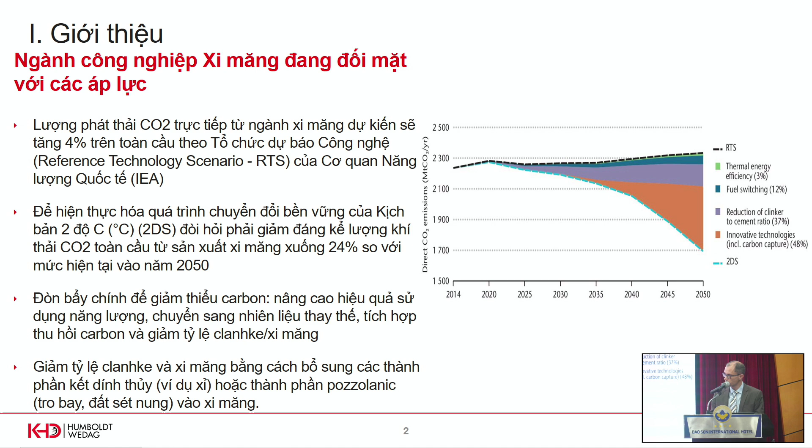So nowadays I want to speak about the clay and the calcined clay issue. What is clay? Clay is a mineral, exactly a hydrous mineral, which consists of silica and alumina, and was formed over the years by weathering. The three main kinds or types of clay are kaolinite, illite, and montmorillonite.

What we can do with this, we can activate the pozzolanic properties of this material by using heat. When we use heat, we dehydroxylate the combined water, the mineral bound water from the clay. As an example, we transfer kaolinite to metakaolinite and evaporate the water. This treatment and this loss of water increases the reactivity of the silica and alumina phases in the clay, and that's the reason why we choose kaolinite as an example. Kaolinite has the highest potential for this transformation for getting a pozzolanic activity.

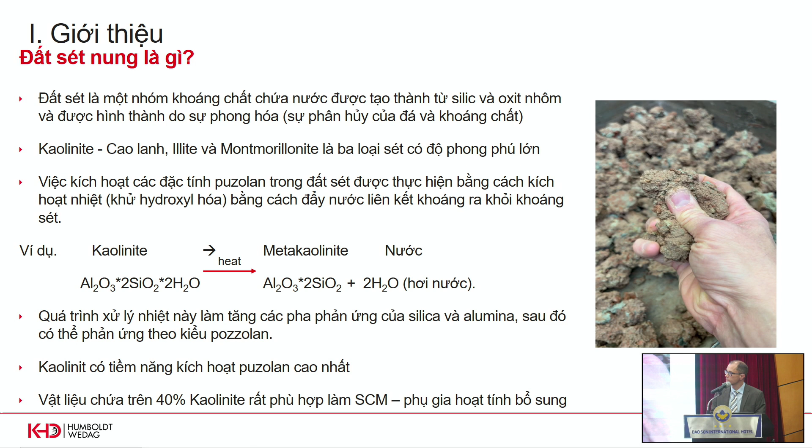In general, really in general, we say when your clay has more than 40% kaolinite, we can use this as SCM, supplementary cementitious material, like this one. And this kind of clay we can use in our plants.

What is the economic situation and the properties of calcined clays? I mentioned we have SCMs now available, mostly slag and fly ash, but this is limited and not everywhere available. Clay is mostly everywhere available, also in the quarries as overburden called waste material. Kaolinite is also often used in the ceramic and paper industry. When the content of kaolinite is too low for them to use, that will be perfect for us.

Because we can also use it for clay calcining production. So all the pits in the world which are not sufficient for the ceramic or paper industry are perfect for us to create our calcined clay.

According to LC3, the limestone calcined clay cement, it's a general overview. We can use the ratio of clinker at 50%, 30% clay, 15% limestone, and 5% gypsum. And we have a little bit of space to increase these figures up to 35 and 20 according to the LC3 formulation.

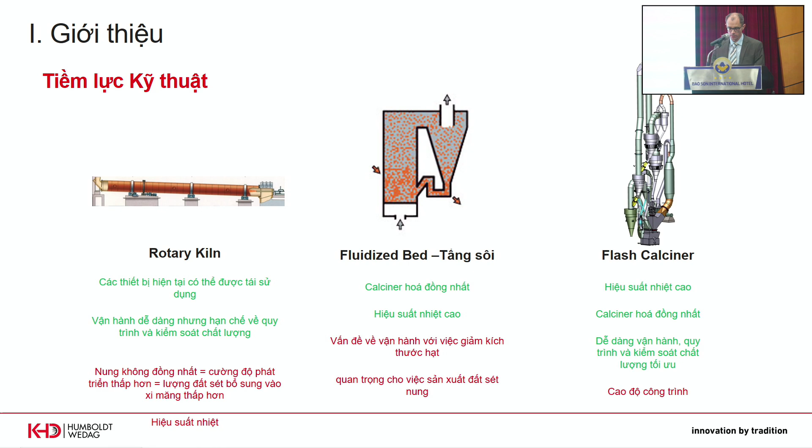The next part is the overview. We have three steps in the process. The first is the drying and comminution process. The second is where the material is preheated and calcined. The third step is the recuperation of heat and the cooling of the product.

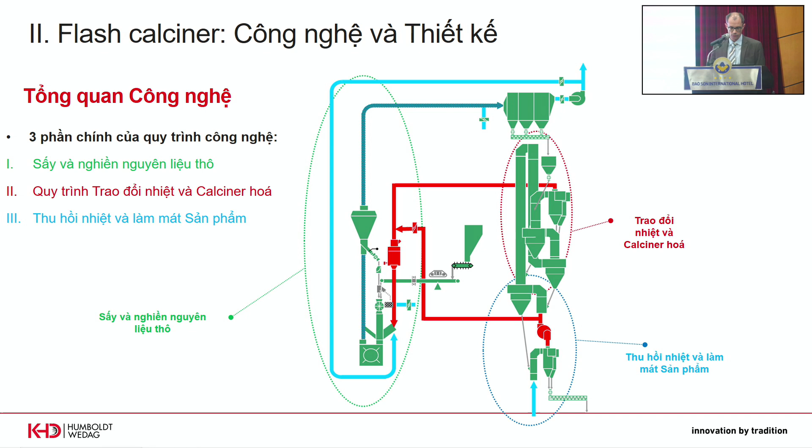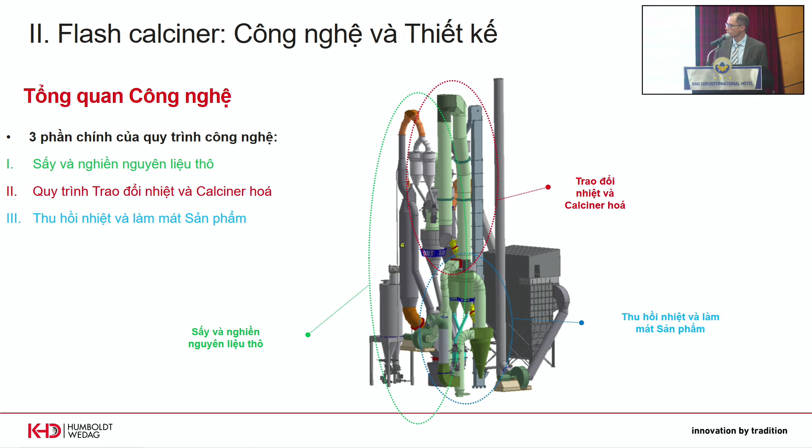So this is the flow sheet, and here you can see a 3D model of this plant. Here is the drying and comminution area, with the hammer mill. Behind it is the separator, and the preheater and calcining section with the calciner and different cyclones. The last part, the recuperation section, consists of two cyclones where the final product is cooled and separated.

The first step is the drying and comminution, let's say grinding of the product. We feed the product into a hammer mill, an impact hammer mill. It's a common KHD product for semi-wet plants, so when we convert old cement plants from wet or semi-wet processes, we use this equipment. This is often done in Russia.

We can handle moisture in this hammer mill up to 25% in the feeding material, with final drying down to 1 to 3% moisture after separation in the filter.

For separation, we have a static separator. The fine material goes to the filter for final separation, and the coarse material goes back to the impact hammer mill.

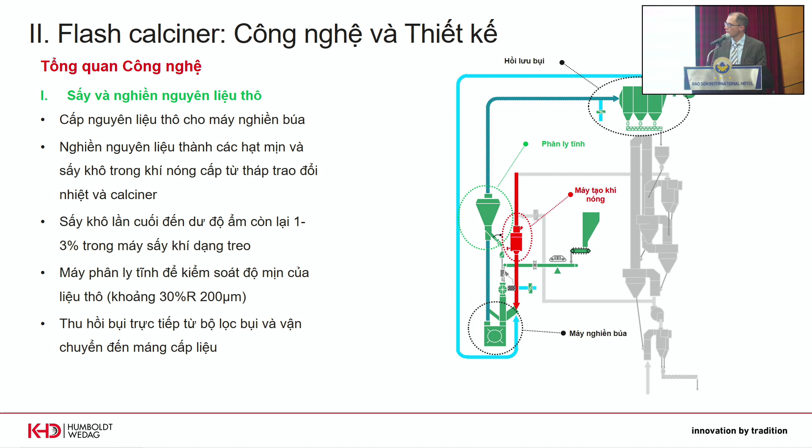I said 25% is our limit. When you have more moisture in the material, we need an additional rapid dryer, which can handle up to 40% moisture. We dry it in this rapid dryer from 40 to 25%, and then we can feed it into the hammer mill.

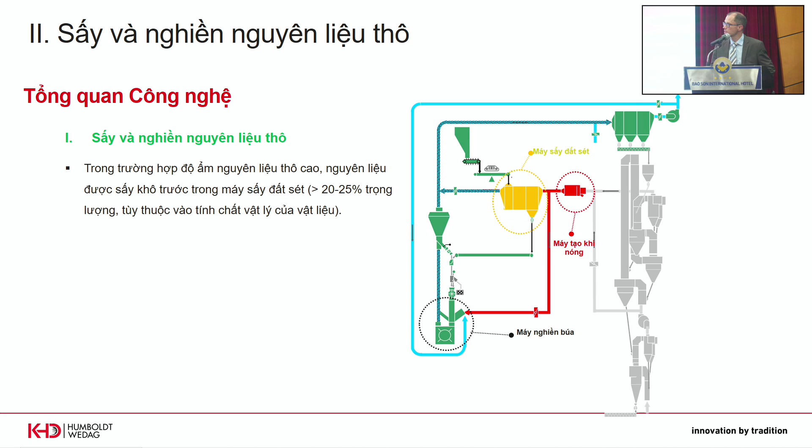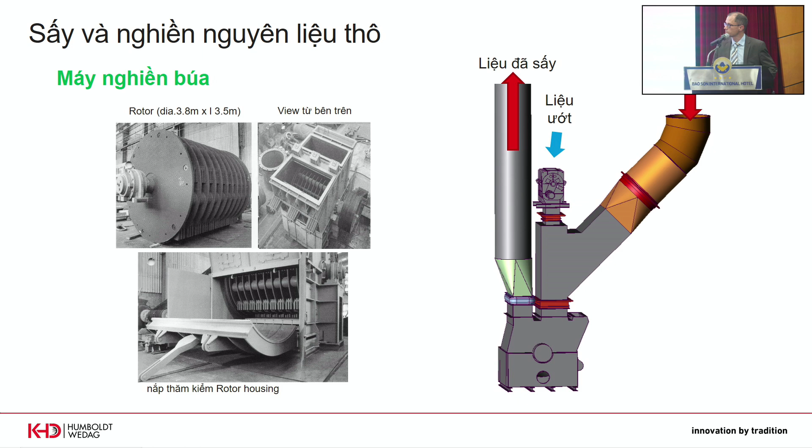That's a picture of our hammer mill. In the middle is the feeding device for the wet material, with hot gas inside, and the comminuted material is lifted up to the static separator. For separation, the coarse reject material goes down to the hammer mill, and the fine material goes to the filter for final separation of the product.

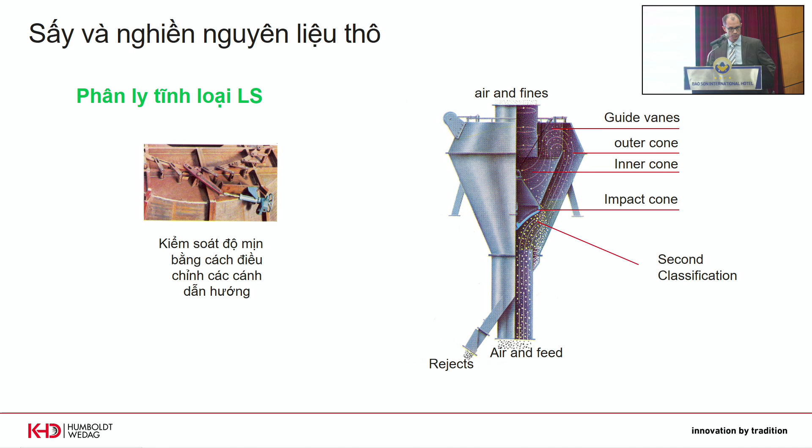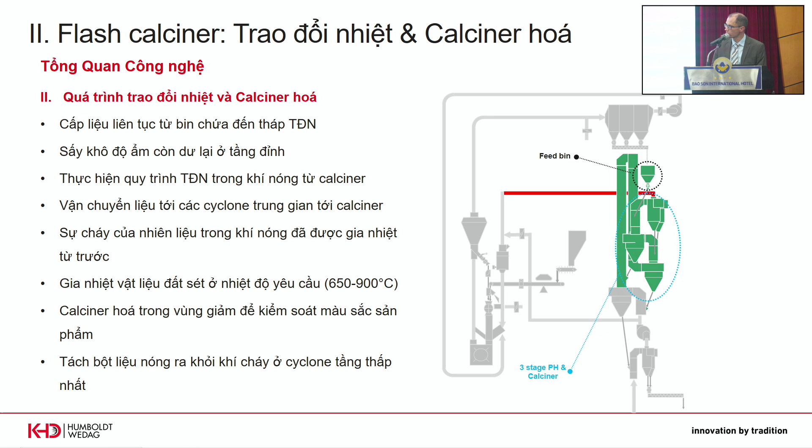Here the burners are installed, and with these burners we create a reduction zone in this area to calcine the material, with final separation done in the last cyclone. This is only a short introduction; I'll give more detail afterward.

The third stage is the recuperation and also the product cooling. So we have a recuperating cyclone and one or two cooling cyclones according to the customer's needs, with a separation of the air between them.

The air we need for combustion goes to the cyclone and to the calciner, where we use it for the calcining burning, and the rest of the heat goes for drying to the hammer mill. So the technique and everything seems not so complicated, but the main point, the critical point, is the color of the material.

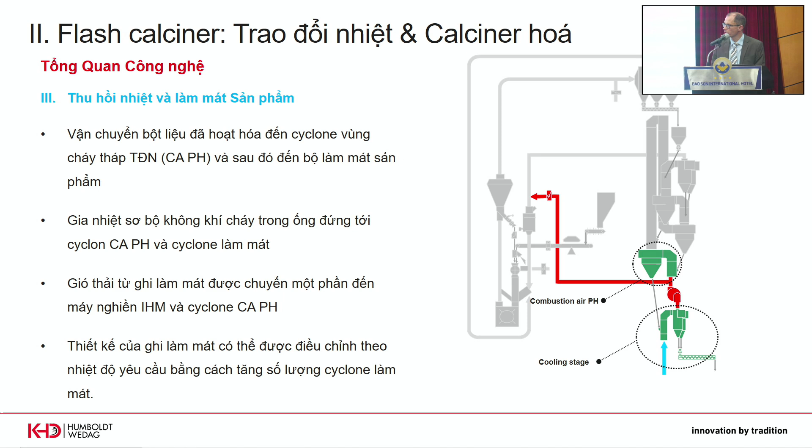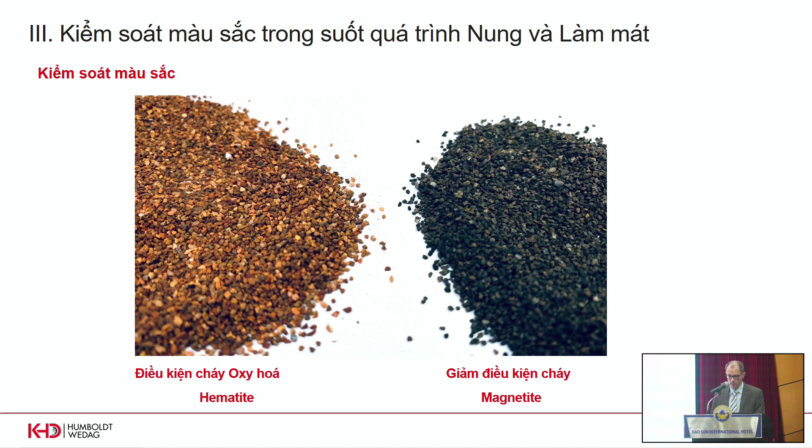When you're using calcined clay in your cement, nobody wants red clay. This is caused by the iron ore or iron oxide content. All the customers want to use the black one because nobody can sell red cement. So we have a matrix for what we have to do to produce black calcined clay.

The Fe3O4, the magnetite - in the calcining process, when you have iron oxide content in the raw material, you get goethite, which has the correct color. But when temperatures are too high and you have oxygen in the system, you will produce red calcined clay. So we have to avoid this. We have to reduce the oxygen - we need a reducing atmosphere and higher temperatures to make magnetite, as the Fe3O4 iron oxide.

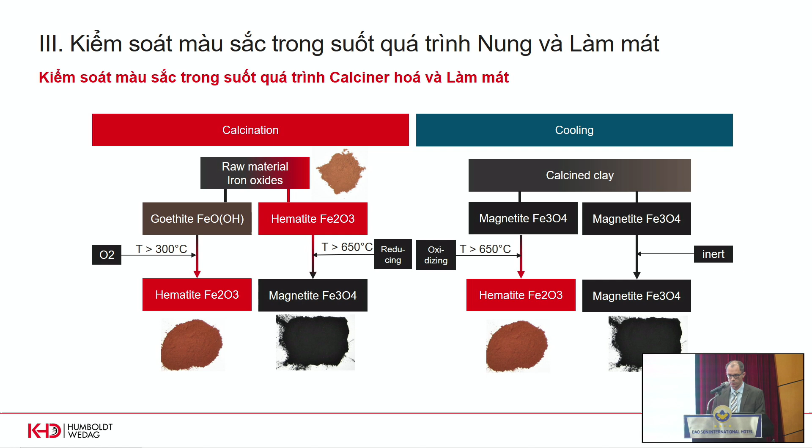For the cooling section it's the same. When we have the black one, the Fe3O4, from the calcining stage to the cooling stage we have to avoid oxygen in the system, because oxygen will lead to the red colored calcined clay due to iron oxide. So we have to reduce or eliminate the oxygen content, either by an inert operation or with a reducing atmosphere. So these are our three possibilities.

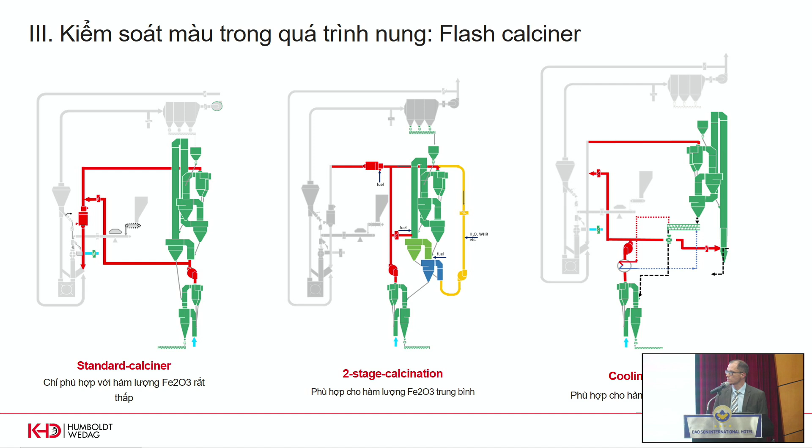That's the easiest one, you see it in the beginning. We have no additional equipment, only fresh air for cooling into the system. We have a burner in the calciner section which reduces the oxygen, so the color is stable and nothing happens. But this is only usable for iron ore content less than 1%. When you have more, up to 5%, we have to use a different setup, and when we have more than 5%, we need additional devices - a screw cooler to cool down the material immediately.

This is only an overview, I will show it now in detail. So that's the easiest way for clay calcining production. As I said before, in this range you have a reduction zone, zero O2 content, so therefore you have no problems with the colors.

Also when you add oxygen for cooling, as ambient air for cooling, all the oxygen will be burned with the calciner burner in the system, and the color will be stable. But it has to be less than 1% iron oxide content. When you have more, which is normally the case, less than 1% is normally only theoretical - in practice it's more.

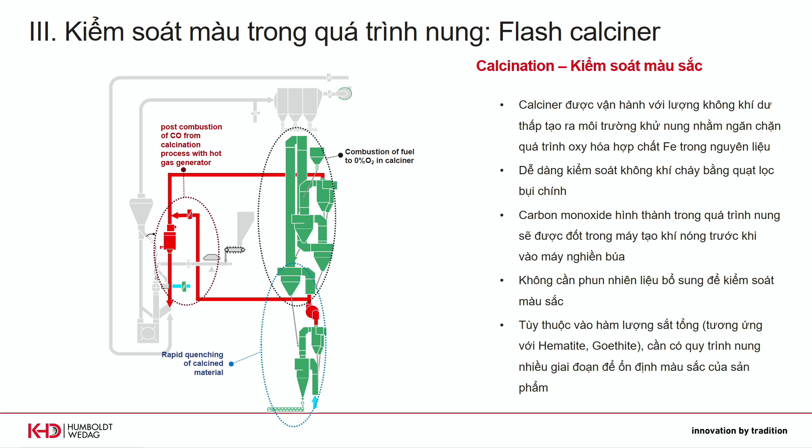We make here a reduced zone of less O2 because of the need for stable color. When we produce some CO in the system here, the CO goes down and will be burned here because we have enough oxygen, so everything will be fine.

Here we have an additional pre-cooling stage. In this cooling stage we don't use ambient air, we use the preheater waste gas from the top, so that we have an inert system. From this section we go to the cooler section, the cooling section with cyclones and ambient air, because we are safe here, as we are below 300 degrees. So the color is stable and nothing will happen with the system.

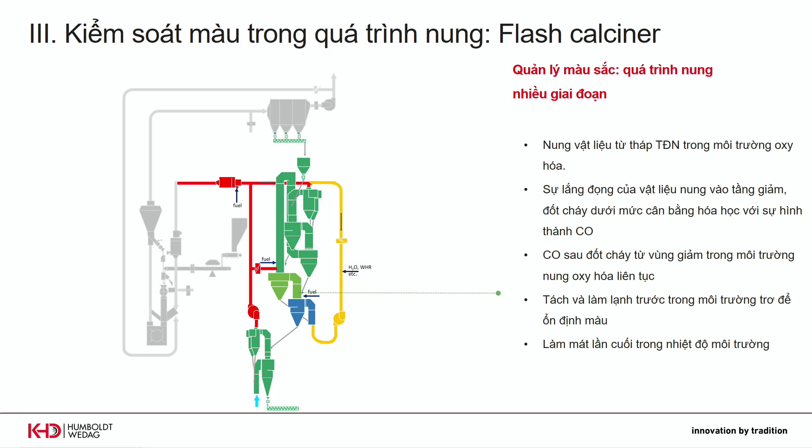When this isn't sufficient, we add a cooling screw conveyor here to cool down the material. In this range, we have up to 700 degrees for the material. It transports the material into the screw cooler, and the screw cooler cools it down to 300 degrees to be on the safe side. With this cooled down material, we can go to the cooler cyclones, and the final temperature will be 100 degrees for the final transport of the material.

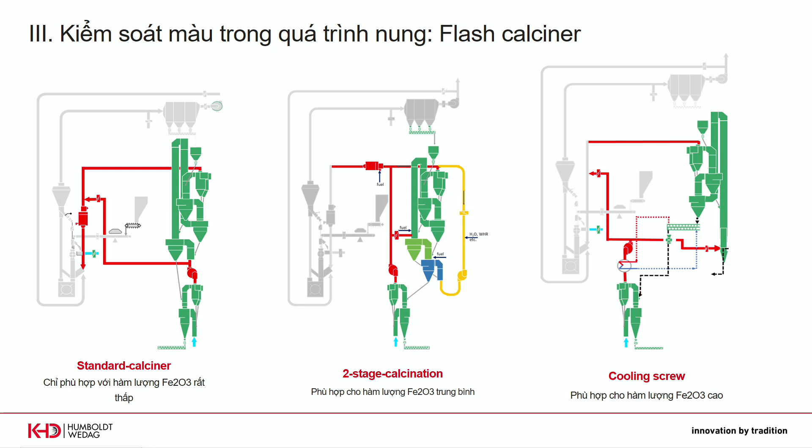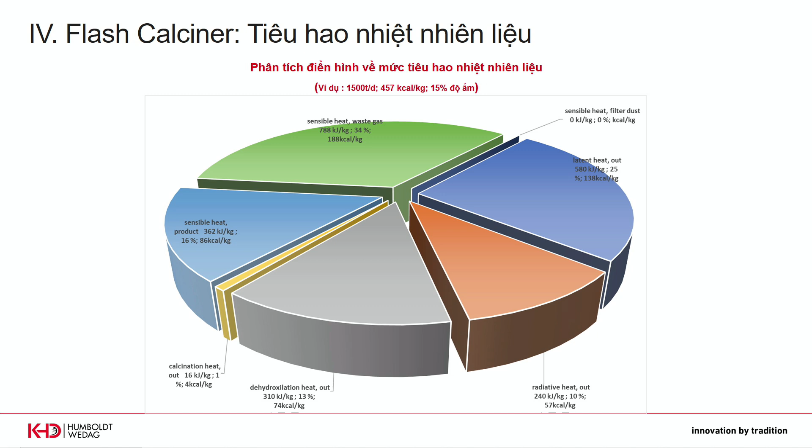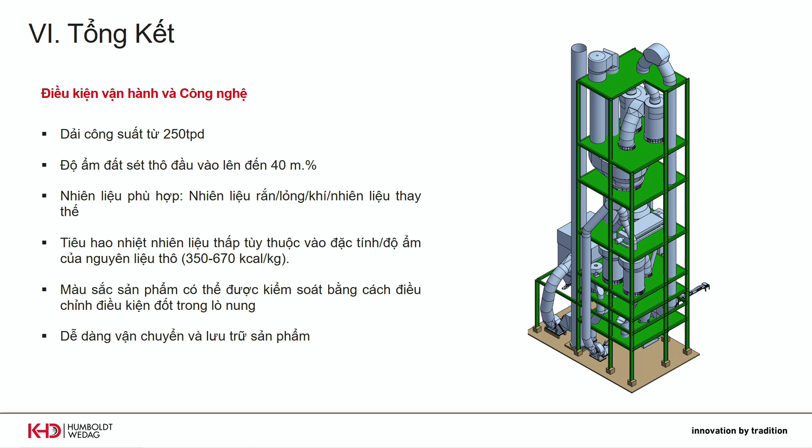I mentioned this is an example for a very big one, 1,500 tons per day. In the first stage you need a lot of height, but it's like a cement plant, preheater, cement plant calciner, so for you it's the usual one, not an unusual thing. I think we have no limitation in the height, and it's still the best possible technology for producing this kind of material.

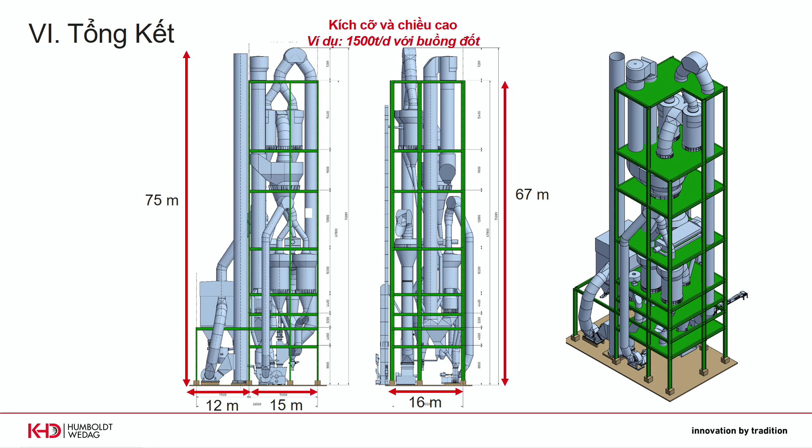So I think it's now the end. Thank you very much for today. I think it's a very interesting theme or topic. It will be the future. As I said before, we have to reduce CO2 in the cement industry by 24%, and one third of this will be done by calcined clay. So I think in the next 20 years it will be one of the most important topics of the whole cement industry worldwide. Thanks.